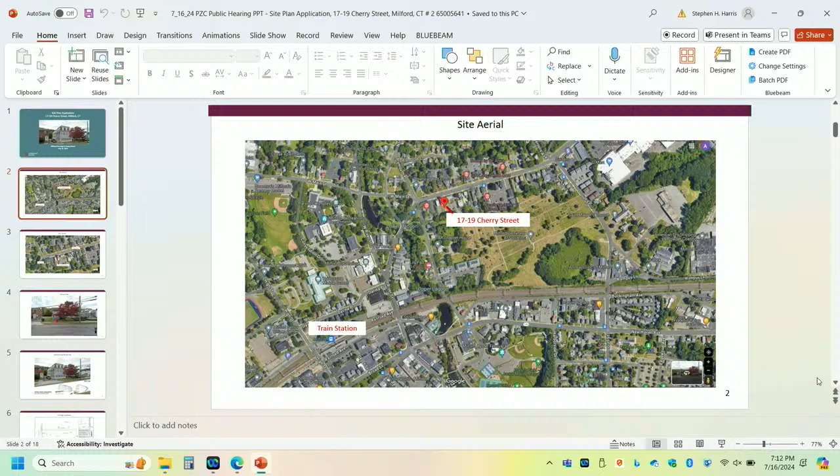Two public bus stops are also located just east of the site on Cherry Street, and one additional stop is located - actually, Mr. Harris, if you can go to the next slide. Thank you. This is just a zoomed-in aerial, and the commission can see the two bus stops to the east of the site along Cherry Street, and then we have one more bus stop to the west of the site at the intersection of River and Prospect Street.

The site as it exists today has a two-family dwelling that was built in about 1920. Site access is via that shared driveway that I mentioned earlier in my presentation, which is shared with the abutting building the commission can see here on the rendering, the brick building located to the left of the page, which is to the east. It's a four-family development.

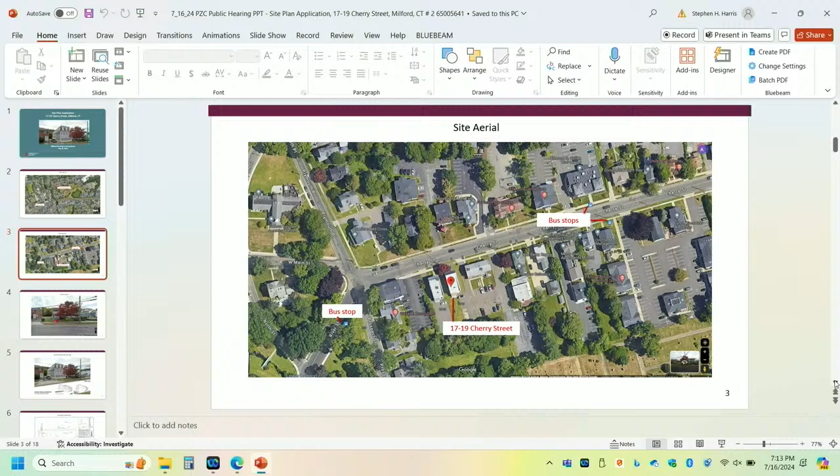Next slide, please. So this is a photo of the existing conditions of the site. Cherry Pie is now seeking to redevelop the property into a new multifamily community with 8 units. Next slide, please. Thank you.

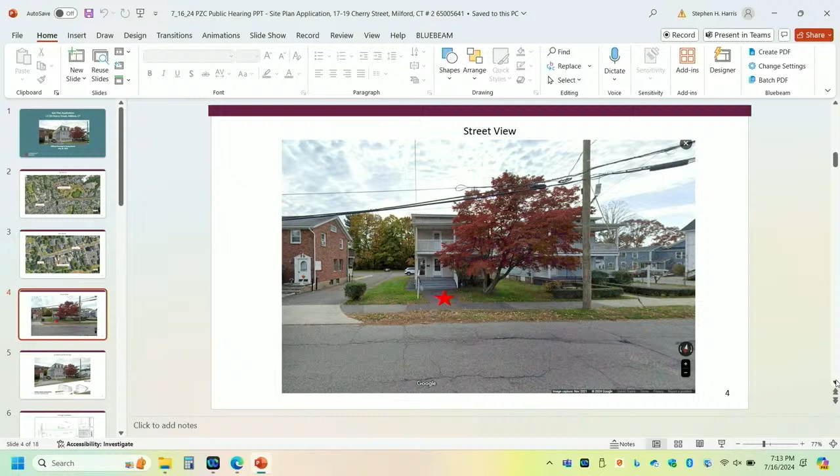This is a rendering that Mr. Gardner put together. He'll be touching on this during his presentation as well. So the redevelopment will be one building, 8 units, which consists of 4 one-bedroom units ranging from about 696 square feet to 839 square feet, and 4 two-bedroom units ranging from about 954 square feet to 1,183 square feet.

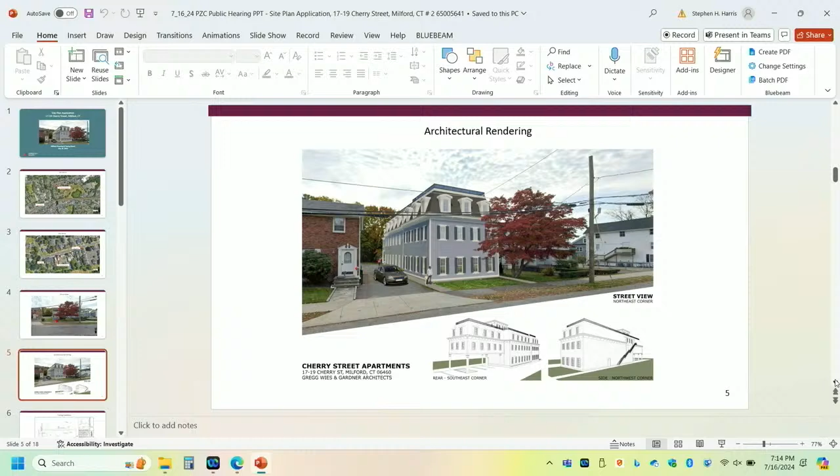There will be 3 residential floors, but part of the first floor at the rear of the building will have covered parking, and we will continue to use the shared driveway. There are 12 parking spaces proposed here. We have essentially 8 surface spaces with 4 auto stacker parking lifts above 4 of those spaces. The 4 spaces with the auto stacker lifts will be reserved for the 2-bedroom units.

But again, we'll touch on this. I'm just giving the commission a little bit more of an overview.

The building will have an elevator, and there will be a roof deck at the rear of the building. New sidewalks are proposed along Cherry Street, and we will be maintaining existing utilities through the Regional Water Authority and United Illuminating.

The application that we initially submitted in March also contained an affordable housing needs memorandum. It's a separately tabbed package documenting the local, regional, and national need for affordable rental housing.

Milford specifically has made progress, but 5.2% of its housing units counted by DOH are deed restricted or subsidized. So 44% of renters in Milford are cost burdened, meaning that they spend more than 30% of their income on housing.

The affordable units that we have here on site, we've proposed 3. They will be interspersed throughout the building, although we haven't specifically designated them. The qualifying income range here is for households earning approximately $53,000 to $86,000 for those affordable units.

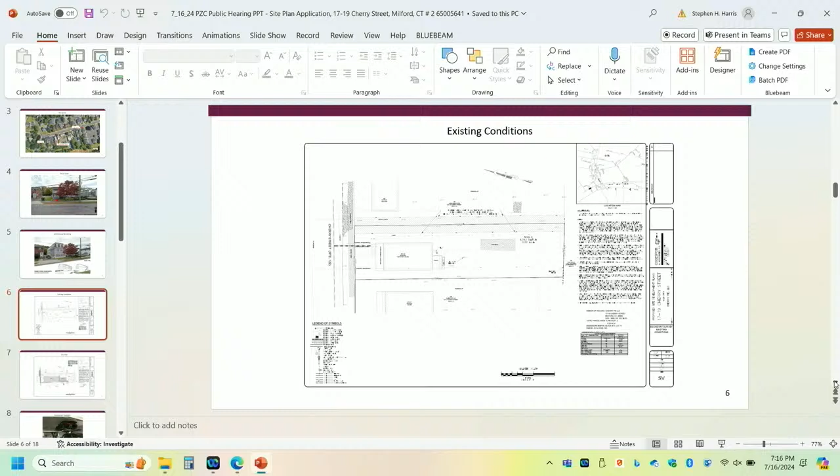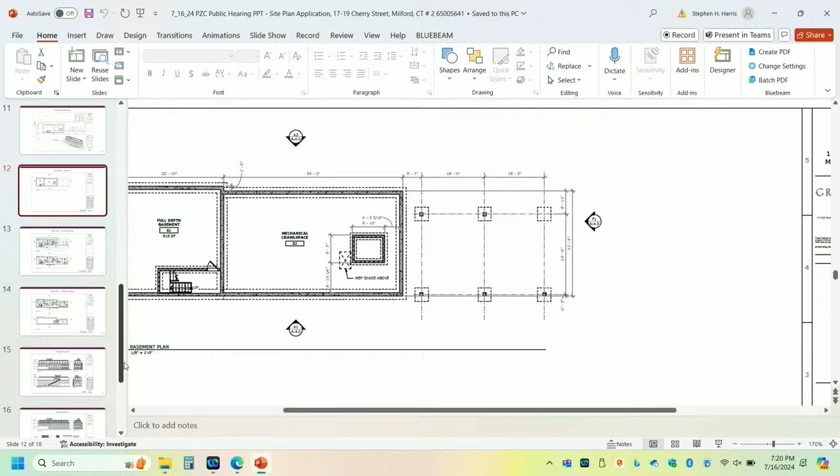Okay, not that far, okay. I think we're going the wrong way. Back up, nope. Back, you gotta go back the other way. Right there, okay. Oh, you don't have the landscape?

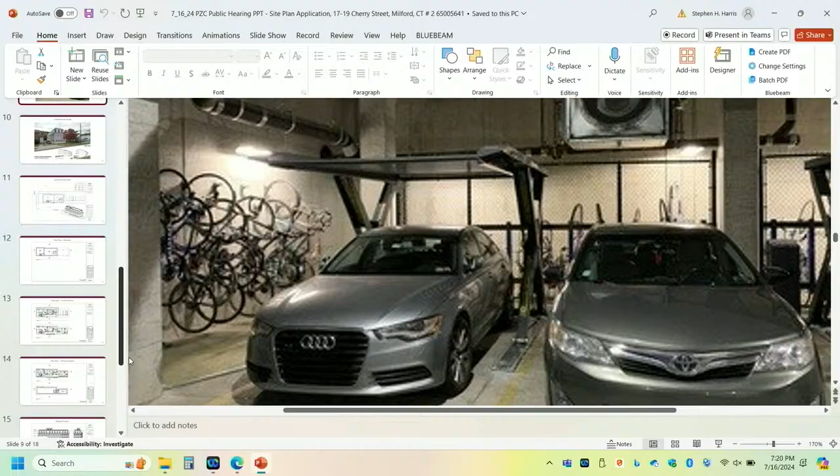On the landscaping plan on sheet SB4, we have fairly extensive planting using native plant materials. The one concern was that maintenance of the plant materials along the street frontage would have to be pruned to always maintain a good sight line coming out of the driveway. The lighting plan uses LED lighting and would comply with your lighting regulations. I think that is all I have at this point.

I think you continue with your presentation unless anyone wants to address questions now. We can wait till the end for questions if you'd like.

Based upon the stormwater management plan, what we're looking at is an existing site that has approximately 61% impervious surface coverage, consisting of the existing building, asphalt parking, and sidewalk area. The site and topography are essentially flat, with a small ridge line running across the front of the building, that portion sloping back towards Cherry Street, and the remainder of the property pitching to the rear towards the cemetery.

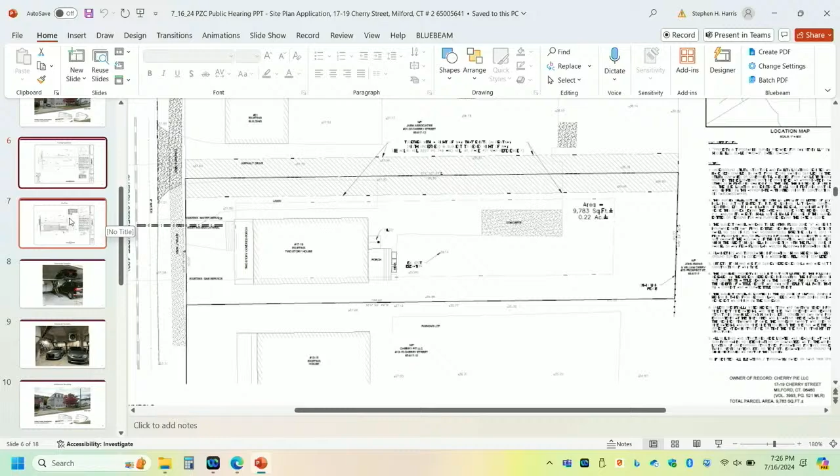Based upon our analysis, it's my professional opinion that the proposed stormwater management system will not have any negative impacts to the site or to adjacent properties, as long as the system is properly installed and maintained.

We're looking at sheet SP3, the soil erosion sediment control plan, comprised mostly of standard measures to be implemented during construction, consisting of silt fencing along the north, west, and south property lines, and a fiber waterlog system set up along the east property line in conjunction with the shared driveway with the property to the east. We also have a topsoil stockpile area provided in the southeast corner of the property.

All major utilities will be provided to the site, consisting of water, sewer, gas, electric, and CATV. As was pointed out before, we have 2 existing fire hydrants: one on Cherry Street, approximately 415 feet from the project area, and an additional hydrant at the five corners on Plymouth, about 200 feet away. In accordance with the fire marshal's recommendations, because we are sprinkling the building and there's going to be a hose connection to the building itself, they typically require a hydrant within 100 feet in order to provide service, and we will be providing that in our proposed plans.

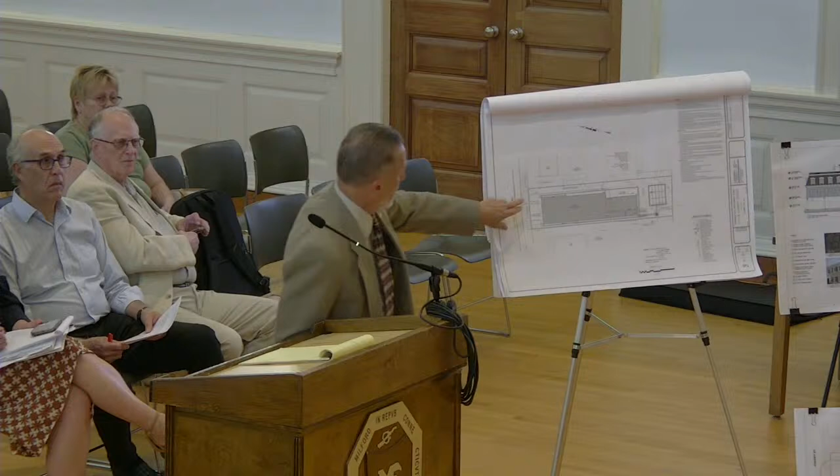Did you calculate the 1,260? What are the numbers that got you to 1,260? Again, I'd have to go back — those were all done in the computer system. It was basically starting from the front line of the building, heading back. And those drawings are to scale, correct?

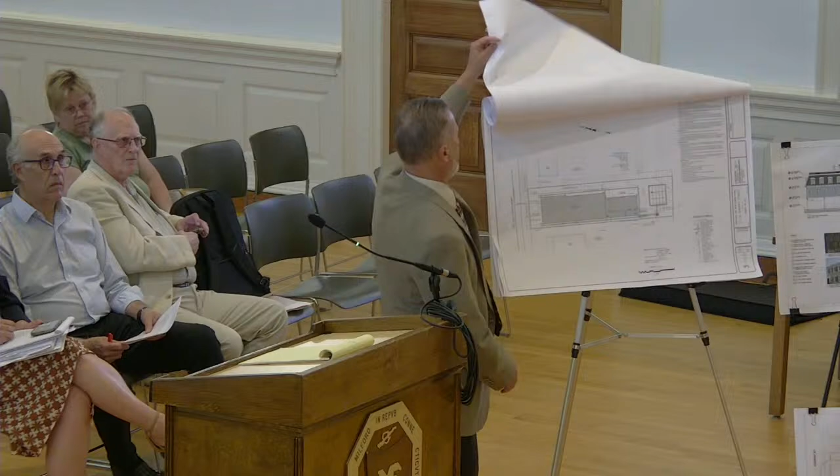I'm sorry, I can't hear unless you go into the mic. The length of the property line is approximately 200 feet. So if we took the 200 feet off of that, and take 20 feet off here because this drains to Cherry Street, and divide that into the 1,260, that's going to give us — if you bear with me — somewhere around 180 feet. So 180 by what gets us to 1,260? Yeah, okay. All right, thank you.

Good evening, my name is Steve Ullman. I'm a professional engineer in the state of Connecticut, employed by Benesch Associates in Glastonbury, Connecticut, and I was retained to do a traffic evaluation for the site development in response to John Thompson's letter. As you know, this is located at 17 and 19 Cherry Street, along the south side of Cherry Street, approximately 240 feet to the east of Prospect Street.

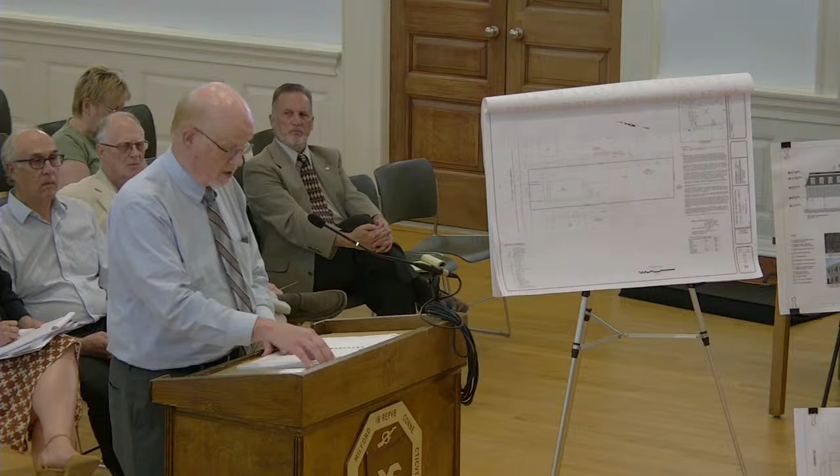It is our professional opinion that the number of trips generated by this development, added to the roadway network, will have little or no impact on the roadway network, and we believe that the development can be operated safely.

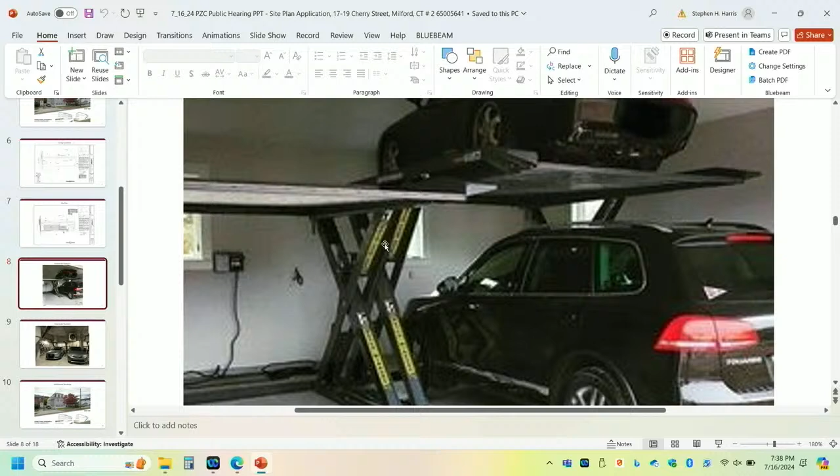At the police commission, there were concerns about the auto stacker and just how it works and what's involved with it. The auto stacker is a unit built for light uses, not industrial uses, mostly residential or apartment type buildings, for someone who has a large garage and wants to get their one car out of the way.

Each tenant that will use it will be given a tutorial by a management company on its operation. They will need to acknowledge and sign a safety training form confirming they received the training and read the manual.

The other concern was how do you handle cars, car on the bottom, car on the top? The auto stackers will be assigned to those tenants that have two vehicles, most likely the two-bedroom apartments. So there will be no issue of one tenant having a car on the bottom and another tenant's car on the top. It will be the same family with the car on top and bottom, so there won't be any confusion as to who has to move the car.

We believe these are safe. People will be trained on how to use them. And if the person assigned that space only has one car, they can either park it on top of the lift, or lift it up and park underneath. So we don't believe there are any safety concerns using it.

I forwarded that information to Sergeant Kraniak this week, and I have yet to hear his opinion on what I provided him, but I did provide it to the commission. If there are any questions, I'll be here, and I'll turn it over to Sam.

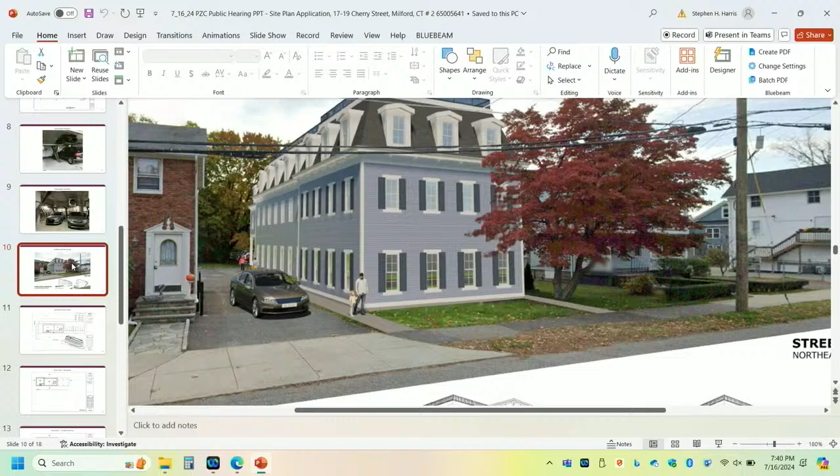This three-story building is a wood frame structure that will have 8 residential units, comprised of 4 two-bedroom and 4 one-bedroom units. The first floor has 2 units near grade level, and to the rear you can see there's a covered parking area. The second floor has 2 two-bedroom units.

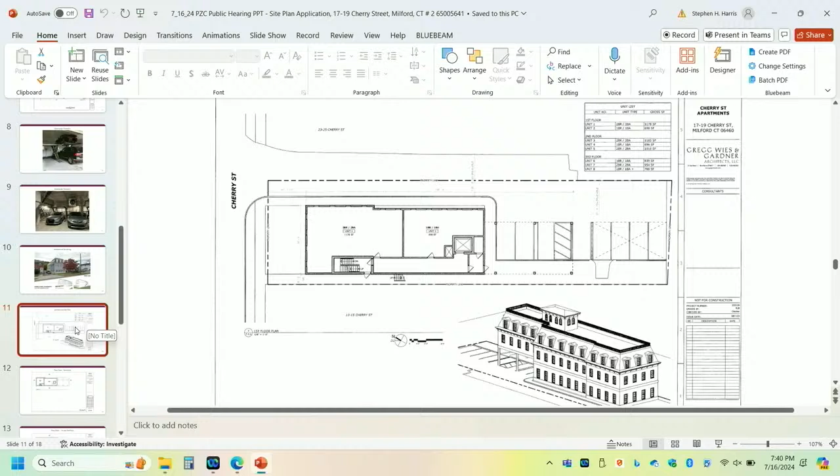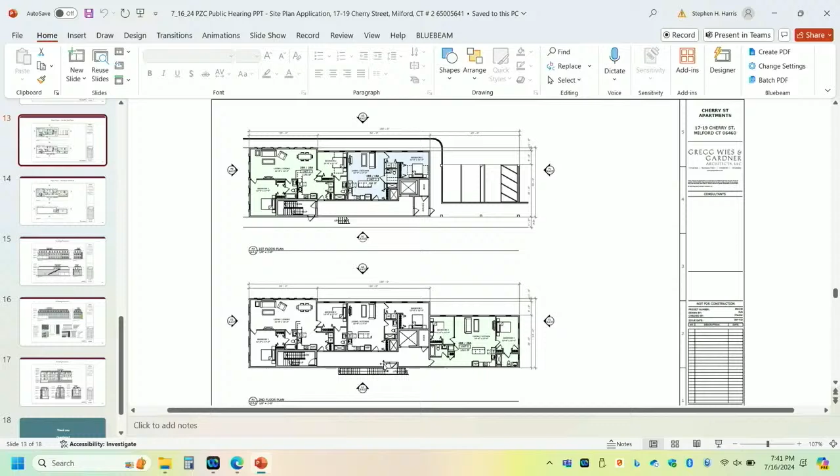The building itself has a roof terrace available to tenants, only at the rear of the building. The front of the building is mostly roof and could potentially be used for photovoltaics if required. The basic gross square footage of this building is 10,000 square feet. We can go back to either of the elevations.

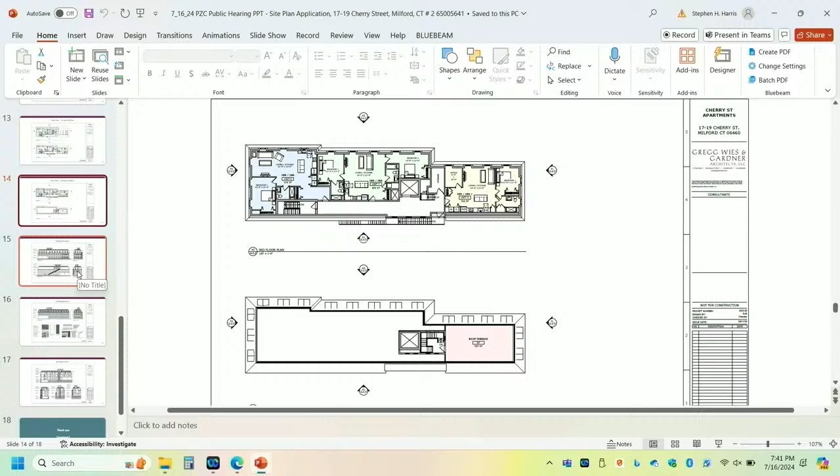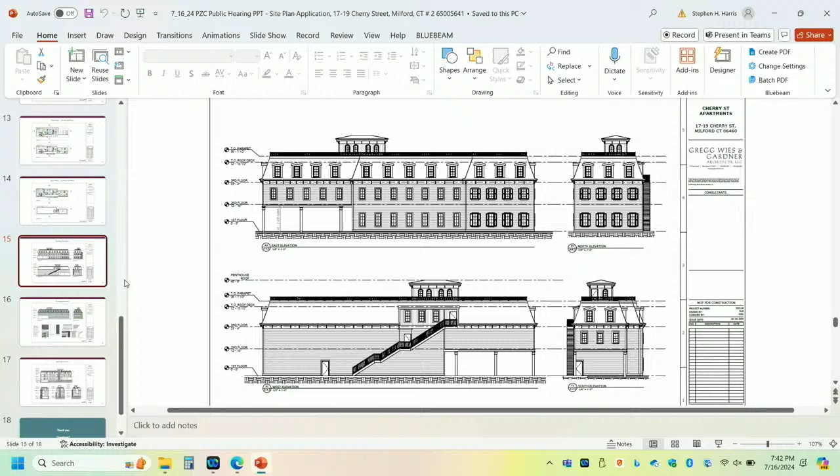Essentially, the building has been designed to look like it was always there, with a style of architecture similar to other nearby buildings. It reads as a 2-story building with a roof. The roof is occupied as a mansard, and there are similar buildings on the street that have exactly the same situation: 2 levels and a third level in a roof plane.

Next slide, please. This is the material board, where we're essentially proposing a gray horizontal siding. All the materials are going to be synthetic, because you don't build in wood anymore for exterior finishes—you either use Hardie board or AZEK trims. The windows will be clad, but inside will be wood. The roof shingle is a synthetic roof shingle that appears like a slate roofing tile.

We also have a decorative railing along the top, to recall historic mansard roof style buildings. We're proposing shutters on the front facade facing Cherry Street, and there will be a frieze board just under the roof plane with corbels, as a decorative detail around the top of the building. We can go to the next slide.

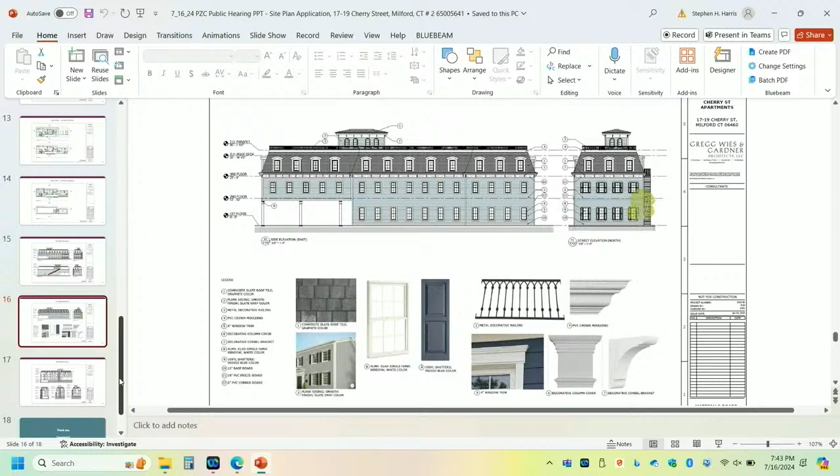Sectionally, what you're seeing is 2 levels of residential in the body of the building, and then a 3rd level which is the roof, but it has units in it. There's a partial basement in the front of the building, only for mechanicals and the sprinkler pump and other things like that. Then we can go back and look at the rendering if that helps people understand what we're doing.

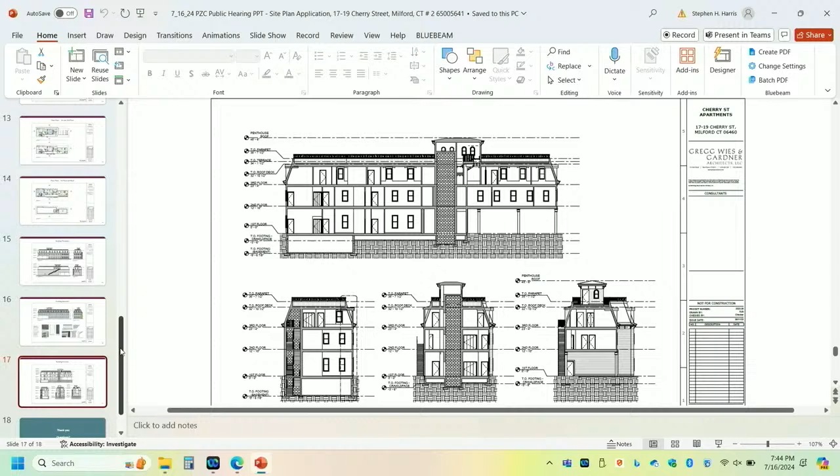The rendering reveals that this building, in terms of scale, is pretty similar to all the other buildings along Cherry Street, and we were purposeful about that. We were trying to keep the cornice line lining up with other roofs on the street, and then you have the mansard roof above that, similar to some of the gables. Across the street, there's a MetroStar building that has very similar massing to our building. That's all I have for now, if you have any questions. Thank you.

Mr. Chairman, at this point, I'd suggest that we pause for commission questions. If there's anything we can answer, I certainly have closing comments, but I don't want to preemptively do those before we answer questions and perhaps even public comment. Very good, that's what the plan is. Would anyone like questions? Go ahead.

Yeah, I'll have a couple questions about the auto stackers. It was mentioned that one on top of the other would be a single column - that would be for a single family or household, right? Correct. My understanding about these is that for safety reasons, with adjacent lifts, basically if you have 3 next to each other, only one person can access them at once, because you can't have multiple people trying to get their car off the lift at the same time. I know there are different designs, but they basically come down and go sideways to let you access your car. So would it be the case that of the 6 stacking spaces - or 8 maybe - 4 stacking spaces, but 8 total cars...

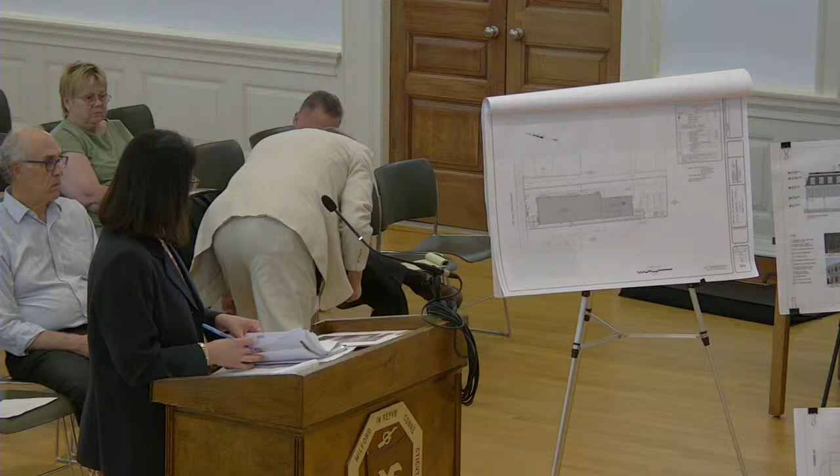Just one moment, board member. I think he's just getting a copy of the plans. Thank you.

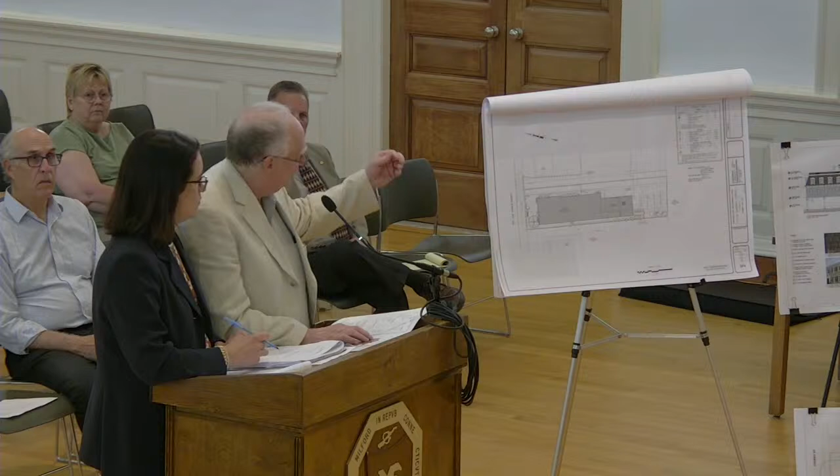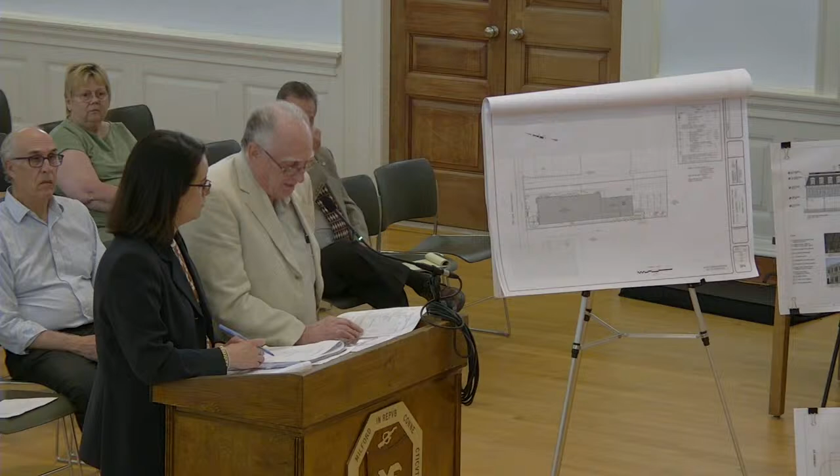Right now, there is shown a Japanese red maple tree there that's got some age on it. If it was assessed, it would probably need to be cabled because of weakness in the trunk line, but it does have a few years left in it, and it would be our plan to save it if we could. Otherwise, we are proposing to replace it with a Shade Master honey locust tree. How old is the tree, Mr. Gordon? Well, I wasn't there when it was planted, but I'd probably guess it's somewhere around 25 years or so.

Mr. Chairman, if I may, just to Board Member Anderson, we're happy to accept a condition of approval that the applicant make reasonable efforts to save or preserve the existing red maple there. So that can certainly be memorialized in the approval. Thanks, I appreciate that. Have you also considered...

Floating the affordable housing units, so that it may well be that you're starting out with one of the three being a one-bedroom, one a two-bedroom, one a three-bedroom, but possibly floating them depending upon your vacancy rate, so you may have two bedrooms that are affordable and one bedroom that's affordable. Have you considered that? That's an interesting comment, board member. The way 8-30g works is there's a next available unit rule, if you will.

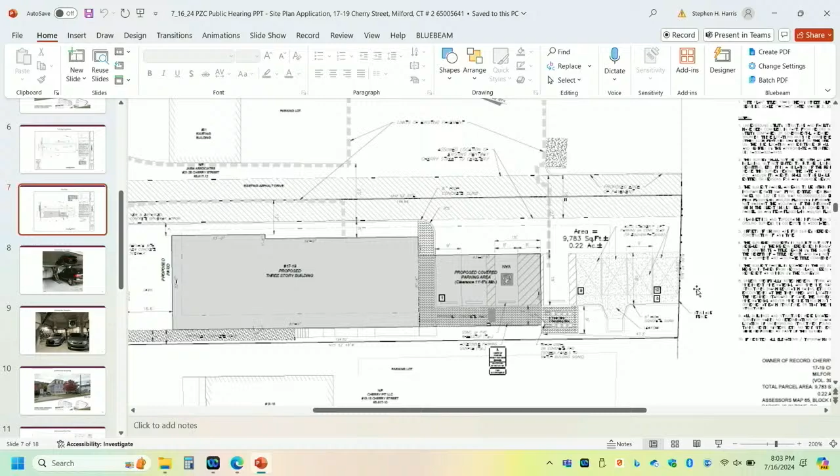Okay, and I'm glad you clarified that, because there's also going to have to be a structure for the auto stackers, and I don't see that in the site plan or the application. If you may, would you mind clarifying what you mean by a structure? I'm assuming the stackers are going to be covered by something. They do not need to be covered. Mr. Harris, if you wouldn't mind going to slide 8.

If you could zoom out so the board could see - this is just an example of what they look like. Obviously this is in a garage, so it's by default covered. We have an example of what they look like, but from what we understand and the way this was designed, they do not need to be covered. There does not need to be a covering to them.

And if we expect that we're going to have young people, children here, how do they get protected? Normally, like a pool, there are ordinances requiring fencing around it so they won't get injured. Understood, and again, we're going to be training the residents on how to appropriately use these. There will be safeguards in place - I don't believe you can just go up to the auto stacker and press a button and it will turn on. There will be certain safeguards to prevent tampering from people not allowed to use them. But if kids are out there kicking a ball around, run into that, and there's no vehicle, they could get injured. I want to make sure about safety - I thought it was under the enclosed portion of the building, but it's open.

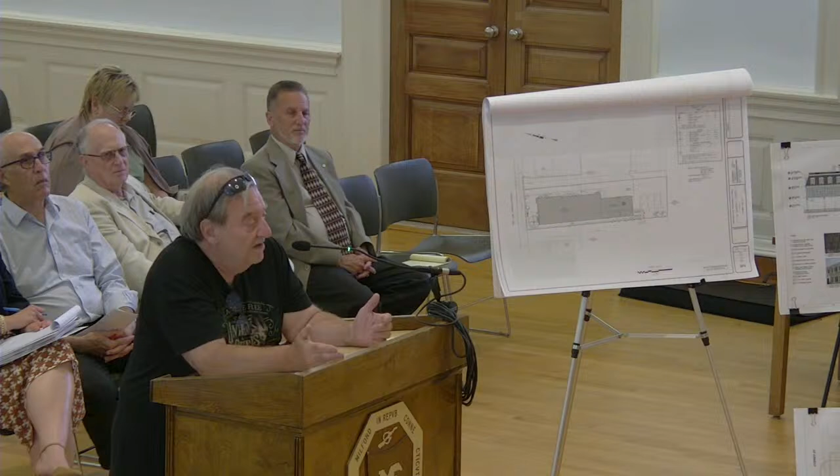And I'm not really against this project, because I even told the guy it's a beautiful looking building. It's going to stick out like a sore thumb compared to what's there, but that's my opinion. Again, I'm not here to knock the project, I'm just here environmentally and safety-wise. I don't know if anybody of you ever saw a car fire in a stackable garage, but I have, in Chicago. It's not fun. Anyway, good luck with your project, and I hope you're our police in Milford.

You're our police. When one person sells their property, that property tax is now spread on 15 people living there. So we get more taxes. Every car dealership that goes in, every condo that gets in, we get more taxes. That's great for us, but let's quiet down what we're building here. We're getting bigger and bigger and higher, and we're not thinking about stuff going into the water.

Thank you for your comments. Thank you.

How you doing? My name's Ralph Malafront. I own 21 Cherry Street, 25 Cherry Street.

The building right next door, they've referenced the shared driveway like they own it. I own it, okay? It's part of my property, number one. Since 1913 it's been called a pathway, so there's an easement to get onto their property.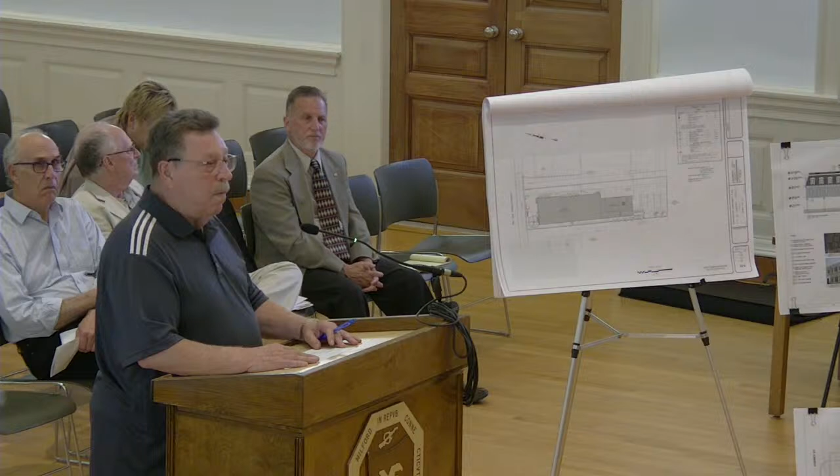On my property, most likely. Not a go. And when it snows, where are they putting the snow? There's no room to move on this piece of property. And the dumpster, where's the dumpster going? I don't know where the dumpster is and how they're picking it up.

I mean, these are legitimate questions. I don't see any answers on this thing. And I'm looking at... can I look over here at this thing?

Mr. Malfront, if you would address the questions to the board, then I will ask them when they come back to rebut, to answer all your questions.

In the four parking spots at the end of the property, I don't see how they get into those parking spots. That's a valid question. I will ask the question to the applicant at the appropriate time.

Doesn't show me, okay? And what else... I gotta go. That's about it. I think they're legitimate questions, and I need answers mostly about where they're parking and how much room I've got to give them for access. It sounds like they're accessing their property off of my parking lot, not off of my driveway. I'll ask that question as well. Okay, thank you.

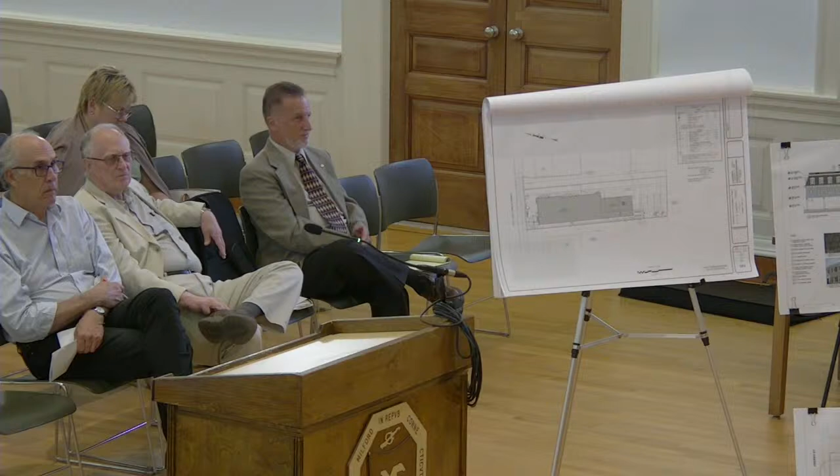Good questions. Thank you. Mr. Malfront, you'll have another chance after the applicant's rebuttal, but keep your thought.

So if you would come back, and if you need to be refreshed on any of the questions I'm going to require you to answer, I will.

Thank you, Mr. Chairman. So I took some notes—if I miss anything, certainly, but it sounds like, procedurally, the board needs some additional information on the auto stackers, including commentary from the police department. I'm seeing a lot of nods. So I think generally, understanding the board has a special meeting scheduled for next week, we would suggest that this...

We do not have a special meeting for next week. Oh, I misunderstood, I thought there was a meeting scheduled for the 23rd. You misunderstood, okay, apologies.

So with that, I presume the board is going to want to continue the public hearing so that we can submit additional information on the auto stackers, and we will respond to some of these questions in writing in more detail.

Regarding concerns about where people will park, I'll say generally that at probably every multifamily community I've worked on, there are always concerns about parking, and generally many of the multifamily developments I work on, if not all, are overparked. The applicant has no greater interest than ensuring tenants have sufficient parking, because happy tenants mean a happy owner.

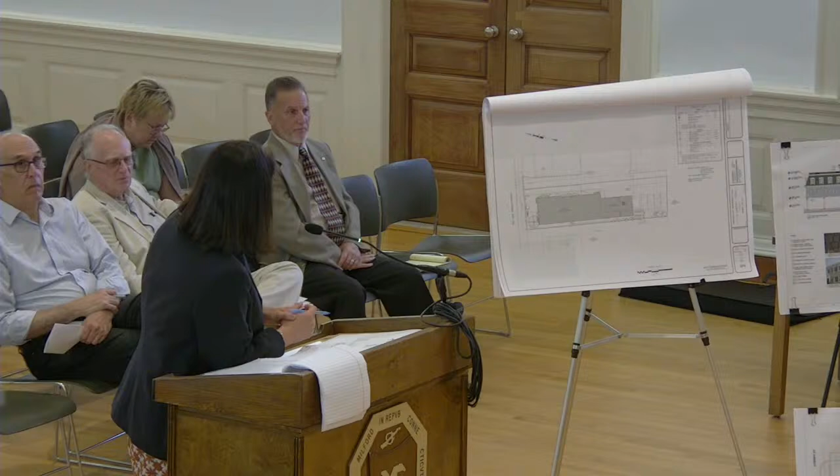So I'm looking at my team. The driveway is expanding beyond the size that it currently is, correct? So my team is confirming what I'm reading on the plan.

We understand that the shared driveway was previously on the neighbor's property, and we have that memorandum issued in May explaining our right. We did research in the deeds for this property and the abutting property. We have the right to continue using what used to be called the Pentway there, but even notwithstanding that, we are expanding the driveway onto our property. So it will continue to be a shared access, I just wanted to make that clear. It's not exclusively on the abutting property owner's land, notwithstanding our right to continue using that.

What if tenants don't want to use it? To that, I'd say practically speaking it would be the same as if any of you were looking for an apartment or a home. If it did not meet my needs, or I did not want to use such an amenity, I would look for another home, it wouldn't fit with what I'm looking for. The same if you're looking for a 3-bedroom unit and they only have a 1-bedroom, you'd keep looking. So the parking situation will be described to any potential renter or resident, and if it's not something they're comfortable with, it will be their decision whether to continue with the rental process. So Mr. Chairman, I think I hit some of the high notes.

Yeah, that's good, I appreciate that. And then when you look at the easement, I didn't see any description of the width of the easement, so clarify your position on that when you come back, as well as show me the turning radius to get into the parking spaces that are outside, and the turning radius to get into the parking spaces that are inside.

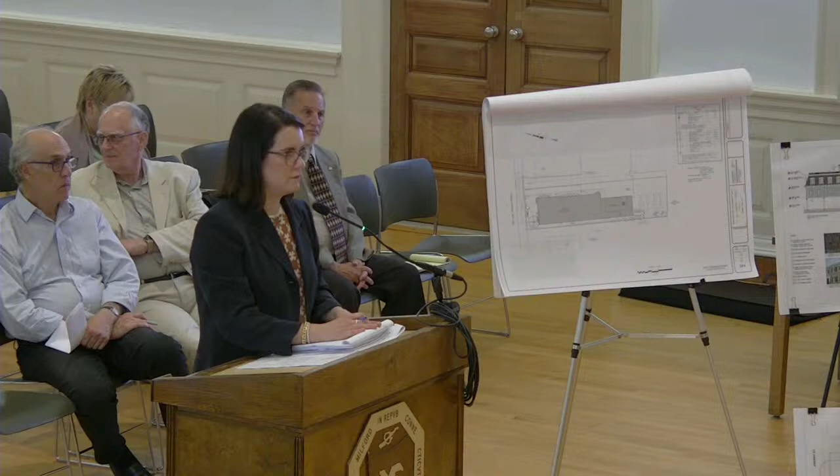Some of those details, if I may, Mr. Chairman - they're in our memo, but we will clarify them in a supplemental filing so the commission has it easily accessible. Yeah, and if you can show us turning radiuses on the blueprint, on the site plan, and have the engineer identify how that is compliant with standards.

Understood. Without objection, we will continue this and keep the hearing open. Stephen, would you want to do the staff report now? I probably should have had you do it before, or do you want to wait till next meeting?

Mr. Chairman, is this a new staff report? What we do here generally is before we start, we have the staff go over their report that they've put in writing, but just to highlight anything they feel should be highlighted.

Understood. May I have a copy? I'm sure you do. Is it Mr. Podolsky's comments? That was, I believe, I'm not sure. No, we did not receive a copy of the staff report. It was done on Monday because we were awaiting the revisions to come in, so it was done Monday. I think it was sent out late Monday, and I know it was sent to the members of the board.

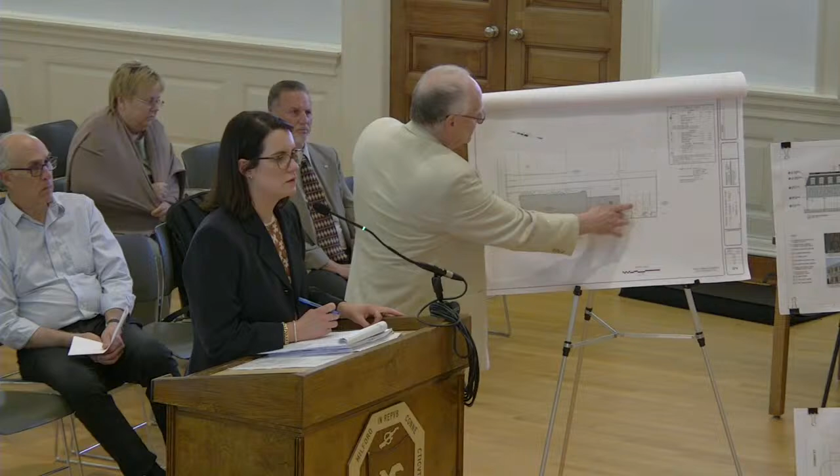Yeah, that would be good if you could identify that as well as the dumpster when you come back with an augmented, clouded site plan to address these questions.

Understood, Mr. Chairman. I just looked at my colleague—we did not receive a copy of the staff report. Then we will make sure you get it.

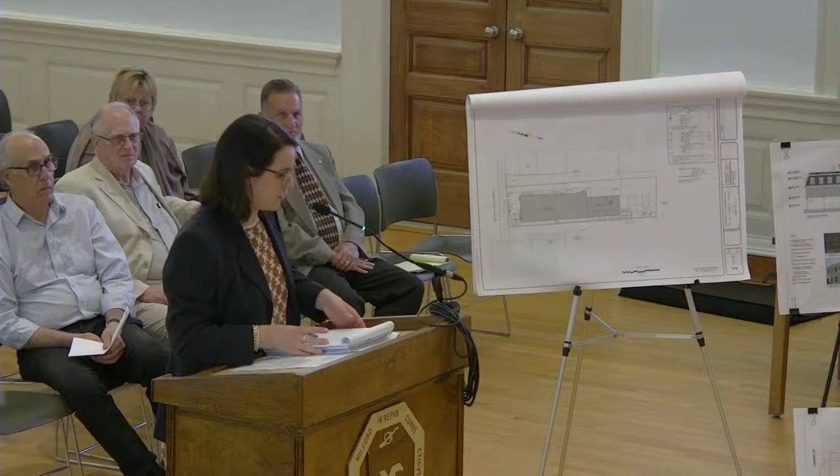Absolutely, thank you. And just so the commission knows, while we have it up on the landscaping plan behind the stackers, or to the west of the stackers, there is a snow storage area indicated. Right, just eliminating one of the low-hanging fruit, if you will. Understood, thank you.

So I'll be in contact with Ms. LaFawn for a copy of that staff report. Excellent, thank you. So this is held open and sent to be on the agenda for the next meeting.

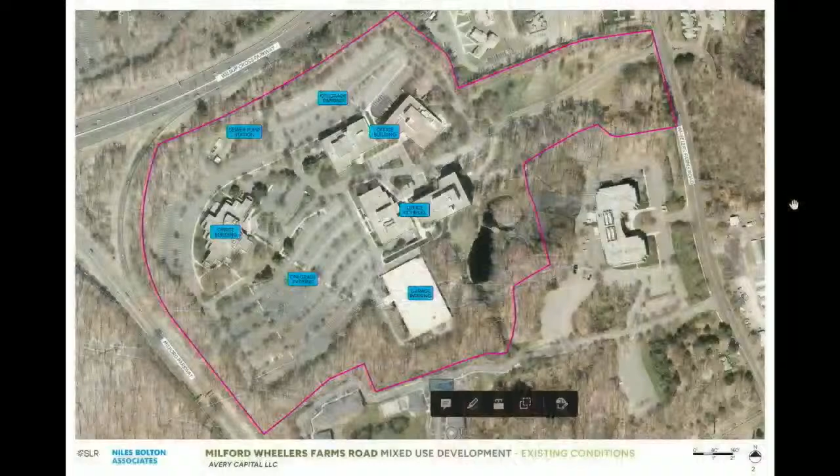What we have tried to promote is a win-win for the property, the region, and the city. I will note there's actually some evidence of what we're trying to achieve here. In the past 2 weeks, Mr. O'Hara, as the real estate broker involved, received a commitment from a commercial tenant to locate a headquarters office use in one of the 2 buildings that we're going to keep and rehab, based on the plan to rehab the building and bring in the mixed uses and amenities. So don't take our word for it—there's an actual recent example of what we're trying to achieve.

So this application is a zoning regulation amendment to create what we call the Adaptive Reuse Design District, ARDD. It includes a statement of uses, a list of the intended uses, design standards, and phases. I'm going to go through this briefly, and then Mr. McDermott will give you more of the detail and the color and the standards. Then we have the preliminary development plan, which at this point is only conceptual, but it shows the layout of all the uses, parking, phases, and amenities.

The Adaptive Reuse Design District Regulation is at tab 2 of the May 15th package. I want to point out that based on our consultations with staff earlier this year, we set this up as a subset of the Design Office 25 regulation. We decided it was not the best thing to do to create a brand new zone. So this regulation, in theory, only applies to the DO 25 properties in Milford, of which there are just 3 locations, 2 of which span Wheelers Farms Road.

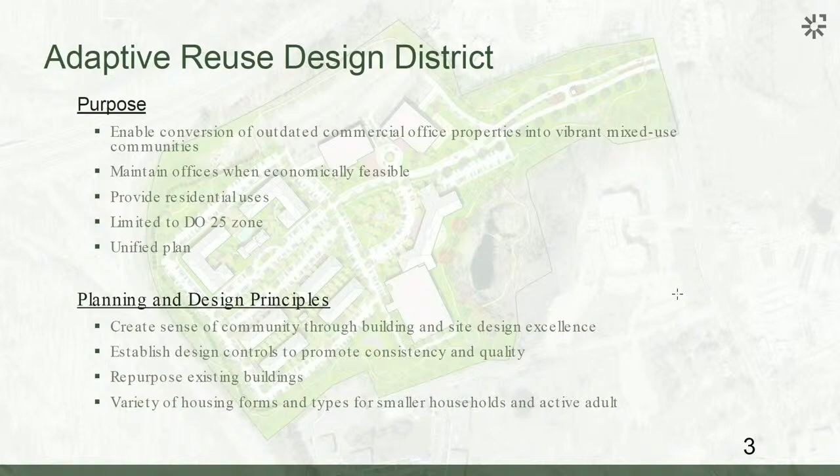So part of the planning and design principles is to create a sense of community. That's why we need larger properties. As part of this, there are established design controls that will be presented as part of the standards and uses to promote consistency and quality within the district. We'll repurpose existing buildings and create a variety of housing forms and types for smaller households and active adults. That's part of your POCD, so we're picking up on that.

Can I have the next slide, please? So, in order to qualify before you, the ARDD must be 20 acres as a minimum. We're larger, but it must be 20 because this could be applied to other properties within other DO-25 districts should you approve this regulation. It must have 250 feet of frontage on a public street, and public water and sewer must be available. So those are some eligibility criteria for not only us, but going forward.

Part of the process requires the submission and approval of statement of uses and standards. We must identify the uses within the proposed ARDD, which may include residential as well as non-residential. The standards must consider area, bulk, location, and density, so you know what you're getting. Building style, height, materials and treatments, so you know how to measure the subsequent architectural plans as they come before you. And as Mr. Hollister identified, it must have the affordable housing provision at 10%.

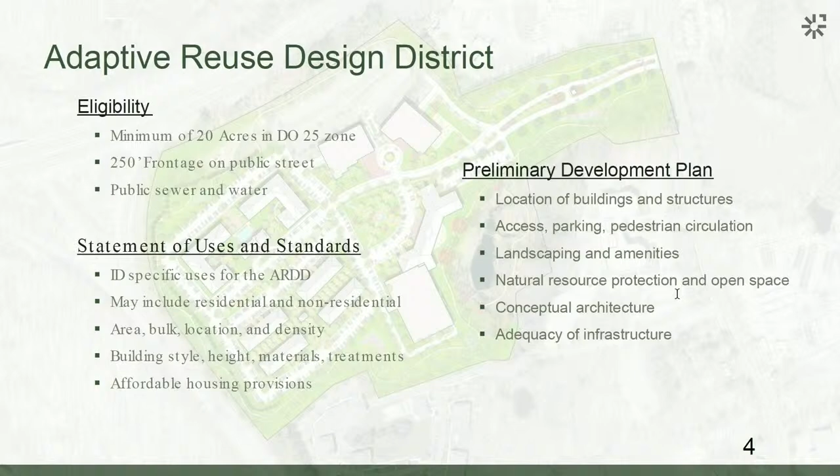This is a two-step process, and we're here tonight for the first one. This is a legislative action by you when you're approving this. You have essentially unbridled discretion, I'm sorry to say, or hopefully you'll exercise it in our favor. That is the approval of the ARDD district, which includes the zoning text, following the zoning text you'd normally have for any zone change, but it must include the statement of uses and standards and the preliminary development plan, which essentially become the regulation for the ARDD. So what is presented in writing, what is shown graphically, are the standards that you measure the final site plans by. That's a little different.

The second step is really the administrative action by the commission, and that is when, if and when the ARDD becomes approved, you're approving the standards and the concept plan. The final site plan must be entirely consistent with what is shown in the original approval. So that includes a site plan following your normal Section 7.1 regulation, in addition to detailed architecture. If the project is presented to you at the time of the ARDD in phases, the site plans can come to you in phases, and as I said, it must be consistent with the statement of uses and standards.

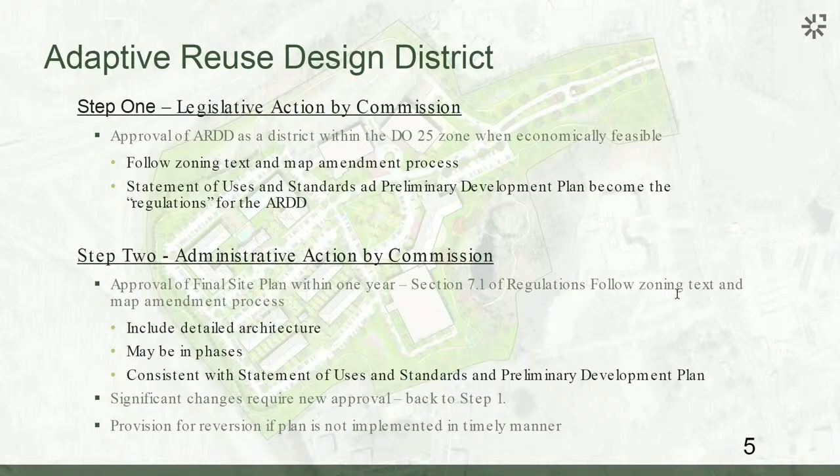Okay, if you don't mind, go back to the aerial, because I want to start there. This is an unusual site bounded by the connector and the Wilbur Cross Parkway, and the buildings are shown here. It really is an isolated section — there are no neighbors on the parkway or on the connector. We have some neighbors to the north, and some neighbors to the southeast. But we have a large property that has some very unique features other than the buildings.

You can see the dark blotch in the middle of the photograph — that's a large pond and wetland area. You can see mature trees along the perimeter of the property that have been preserved as open space, but you can also see within the parking lots and around the buildings other mature vegetation. So the goal here is to fit our development within that 47 acres, currently zoned DO25, as you know.

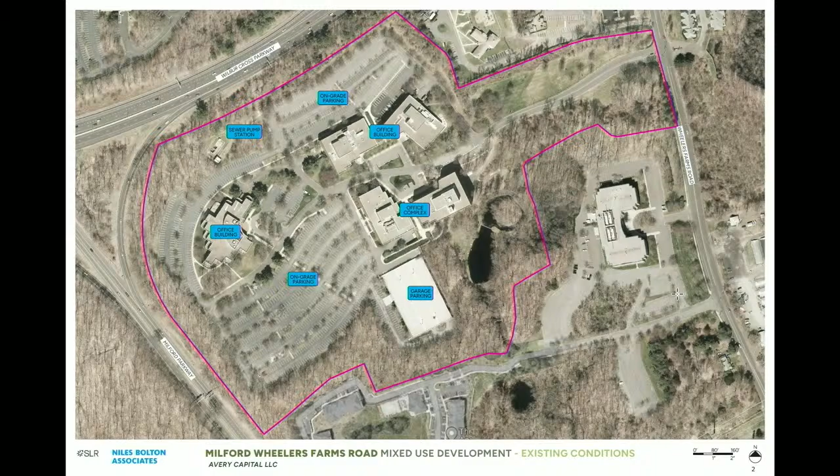This is sort of a standalone property, so we have an ability to create a new community. As pointed out by Mr. Hollister, we have the 5 buildings, an existing parking garage, and access from Wheelers Farms Road. Right now there are about 1,720 parking spaces. Now, I can go to the proposed development.

This unique opportunity we have is to convert outmoded 1980s style development into a productive asset for the city. The vision here is to create an active, exciting, mixed-use community, full service to support live, work, and play. We will have attractive amenities, both for the residents and for the community who may want to visit. We're going to maintain some of the existing buildings, preserve the mature trees, and also restore the wetland as needed.

As you're entering the site from Wheelers Farms Road, you see what we have created as a boulevard, and that has two purposes: one, to create a well-landscaped community, but also to provide a means of exit in the event that one of those sections of the boulevard becomes blocked. You can also see the extensive landscape treatment in the various shade trees and ornamentals that we're showing on the plan.

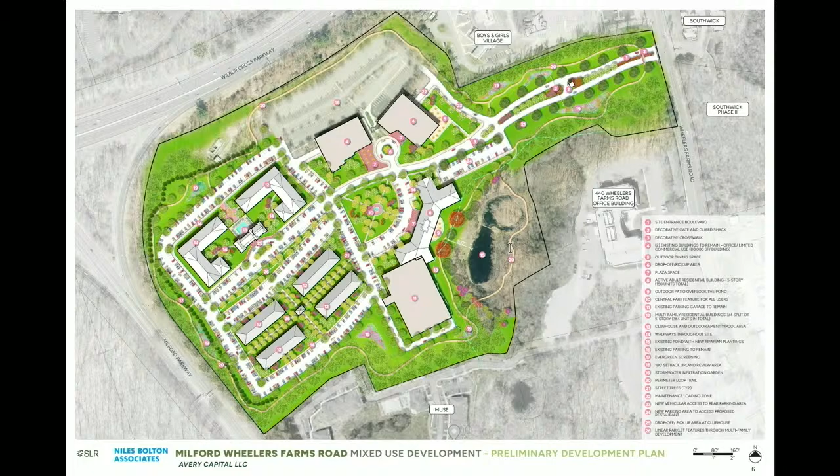Hi, good evening, members of the board. My name is Walter Ploskin. I'm a licensed architect in the state of Connecticut and 11 other states. I'm a principal and partner in a firm called Niles Bolton Associates. As Mr. McDermott described, we're based in Atlanta. I manage our Virginia office. We practice nationally, currently working in more than 30 states, and next year we'll be celebrating our 50th anniversary.

We focus primarily on multifamily housing and projects like this one, a master plan community with a varied type of housing units that promote diversity through a mix of uses—in this case residential, commercial office, and retail. Our firm has completed over 30 projects in the state of Connecticut, so we know the state well and what the market is looking for. We're excited to share with you the vision of the project through the programming, as described in the statement of uses for the site.

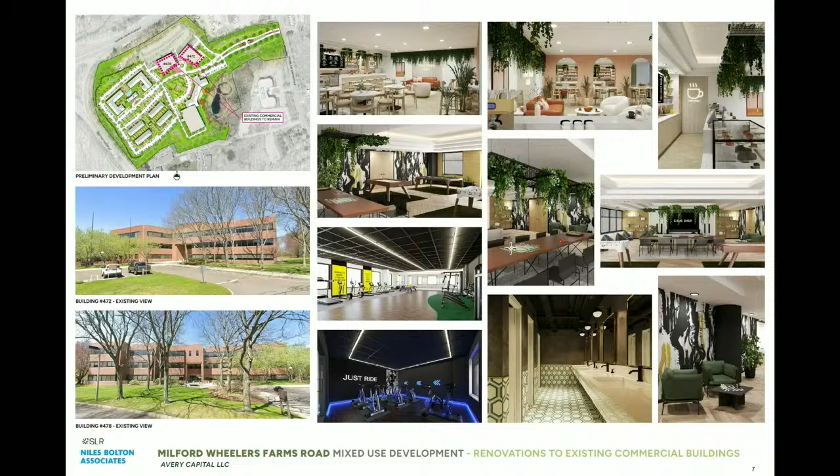The slide on the screen describes the first two buildings that Mr. McDermott highlighted, which are the two office buildings. Those two office buildings are consolidating all the commercial office uses on the site. But in addition, there's a commitment to reprogram or add program to those office buildings that would be more in line with what the market expects from commercial office today.

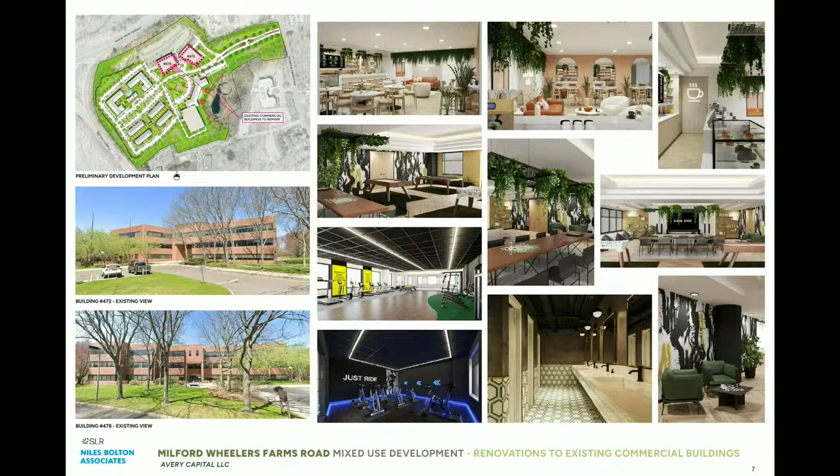That's enhanced amenities that very closely mimic what you'd see in a residential development. What you see on the screen is examples of intimate and communal gathering spaces, fitness and gaming sections, as well as retail opportunity, and in this case a planned restaurant that would serve the business and the community throughout the day and be open to the community at night.

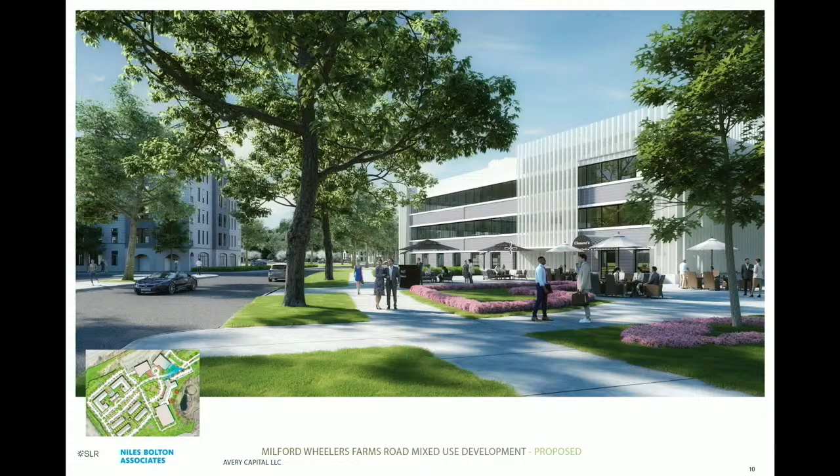Along the end of the boulevard as you come onto the site, we are improving the elevations, the facades of the office building by updating it to more contemporary materials and aesthetics. You can see in the foreground on the right, there's the programming for the planned restaurant space and an active seating courtyard in front of it. And with that, we're planning on adding hierarchical elements to the facade so that you understand the places of use throughout that building as not just a pure office building.

You can see that we're planning on it being a very active, welcoming space as you enter onto the site. The next slide walks past the second office building that's being preserved. You can see off into the landscape in the background, there's a faint image of the existing office building, which would be sort of the horizontal line between the trees at the end of that boulevard.

The next slide shows your first close-up of what the residential buildings would look like. We would continue the facade renovations for the office building to the second building as well. Opposite that office building is where you see that park that Mr. McDermott described on the left-hand side of the image. The residential building in the background...

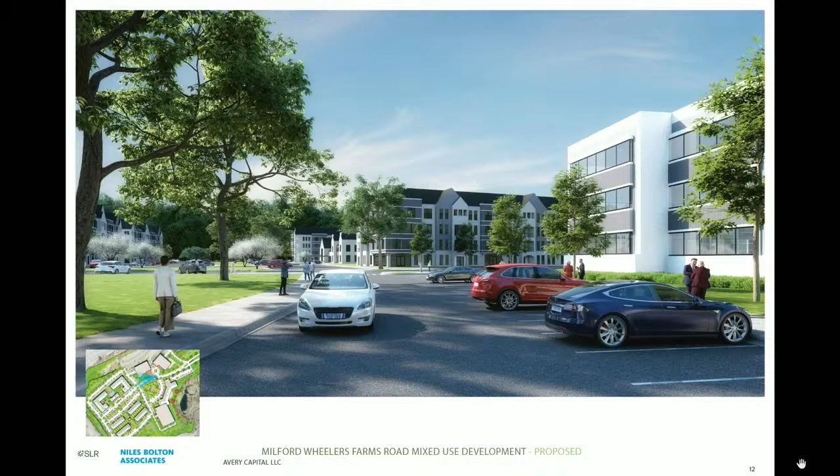You can see we've got varied roof lines, hierarchy in the facade, and it frames the main amenity area as well. Just to the left of the taller portion of that building, you can see a little white cottage kind of nestled in between the building arms. That's the main amenity building. We'll talk about that in a minute.

The next slide shows a little more detail of the materials we're planning for. Very traditional, familiar materials—we're planning on using some masonry, some siding, as well as asphalt shingles. Very standard materials that you see around all of your neighbors, as well as timeless materials that will create a sense of place and a sense of commonality between all the buildings and still allow them to be varied.

The next image shows the same building facade as an orthogonal image, a typical floor plan, as well as the standard ground floor plan. So you can see that we've planned out all the units in this building. We know they work and we know they have access to both the parking that surrounds it.

As well as the amenity space inside of it. These two buildings would account for 220 units in a mix of 1, 2, and 3 bedrooms. The placement of them is really to start the residential component in a slightly more dense version. We've got a 4 or 5 story building there, taking advantage of the grade as it falls down, but then concentrating the number of units around the amenity space. So it really establishes the purpose and the use of the site in the first residential phase.

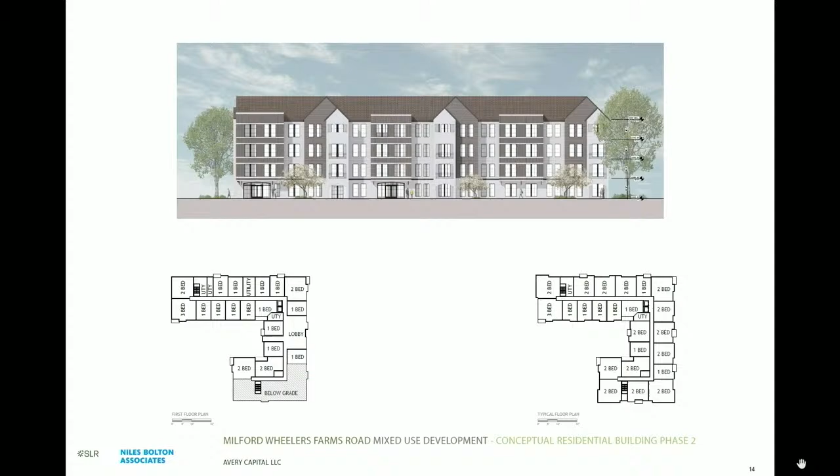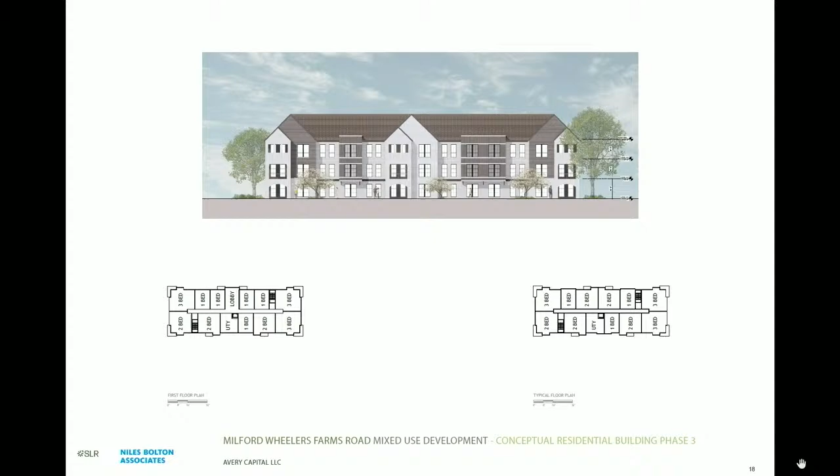The next slide shows that same elevation in orthogonal as well as the typical building plans for that. These units are going to be a little bit bigger. They're a little more remote from the amenity space, so they will have access to outdoor space around them, described as the parkland. But because they're a little further away from the main amenity space, these units are thought to be a little bit bigger in size and a little more self-contained.

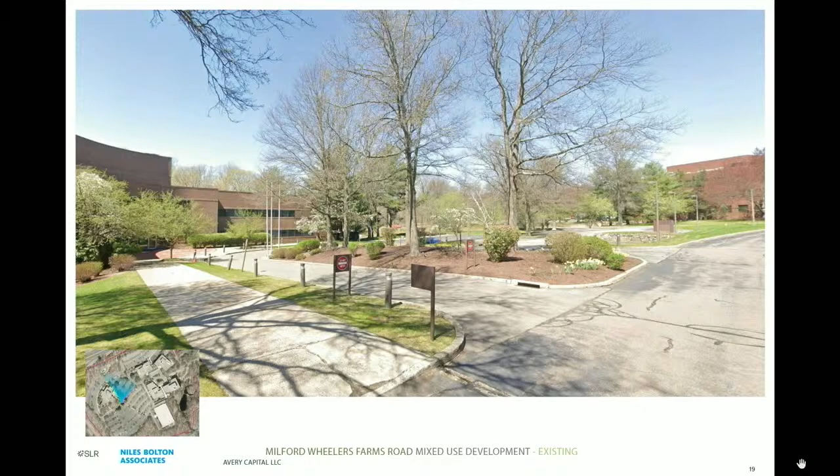The next slide shows the view from that terrace parking lot back towards the existing office building, but the real home run to this image is the next slide where you see the clubhouse.

The clubhouse is thought to be a traditional cottage that has been added onto over time, so it's very traditional and familiar in its appearance, but it allows you to have a lot of the varied amenity uses we'd be looking for. Those uses would include all the common gathering space for the residential community. It would have a club room, a game room, lounge space, co-working for those with a flexible work schedule, as well as a dedicated fitness center.

All of that would open up to the pool deck area behind the building, framed inside of the 2 L-shaped buildings, acting as a buffer from the highway to the rest of the units.

The next slide shows that clubhouse in elevation, using the materials we've been talking about, but in a slightly different way, elevating the architecture where you want it to be around the main meeting spaces or the main community spaces, but still very, very residential, yet in a clubhouse kind of language.

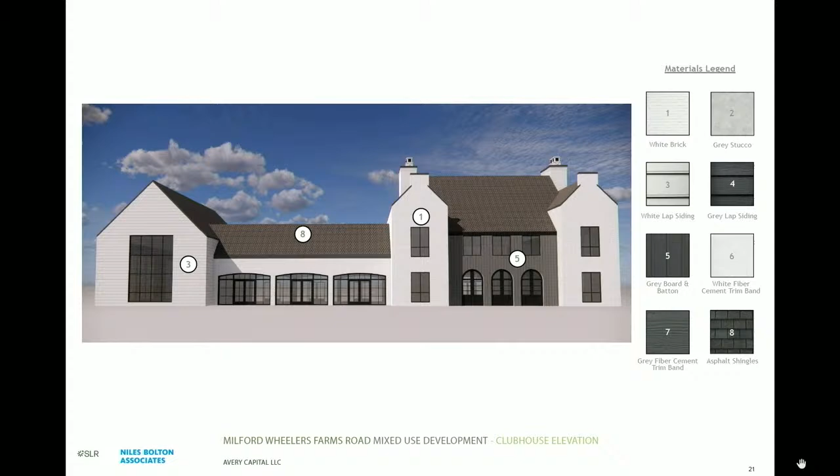And the next slide, that's in elevation. No plan there yet because it involves a much more detailed programming plan to get all those common uses into it.

The age-targeted building, you see a glimpse of it on the left-hand side of the image. It's the tallest version of this architecture that we're proposing, at still only 5 stories, using all the same materials.

The difference with the age-targeted building is that we anticipate a different kind of user for this kind of building. This user might be a move-down from an empty nester, or working professionals that never had a family. So these units are planned to be more 1 and 2 bedrooms, but they start to include dens, so you have that at-home working space or that visitor space that when your family wants to come over you still have living space to spread out to.

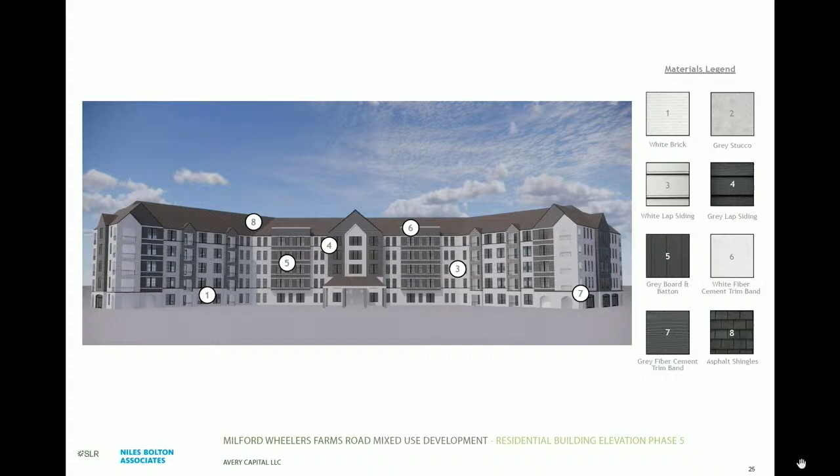The next slide shows it in elevation and the plans showing the lobby space, the club room, and the amenity space. The leg to the left that looks a little truncated is the side that hugs the existing parking structure. The club room would open up directly to the southeast view where the pond is, and that's where our pool deck and outdoor amenity space would be.

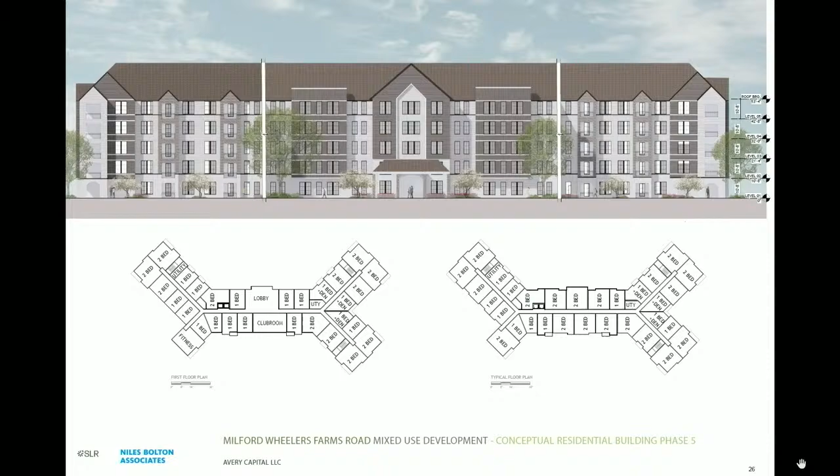And that describes all the uses through the architecture design. And with that, I'll turn it over to Mr. Malone. Thank you.

As you can well imagine, this is a significant project that will get built in phases. In fact, the first phase, and I'll walk you through the phases here, is interior renovations of the office buildings, because in order to keep the tenants that we now have, there will be some movement from one building to another before we can proceed with the balance. So the first phase is the renovation and repurposing of the existing buildings.

The second phase, shown in yellow, will be the entrance drive that I described earlier, all the way carrying through to the larger block of yellow coloring for the L-shaped multifamily buildings.

Third phase, we move into the blue areas, and those buildings would be multifamily as well. But in addition, at that point, we would be able to construct the walking trail, that particular amenity, as well as the restoration of the inland wetland.

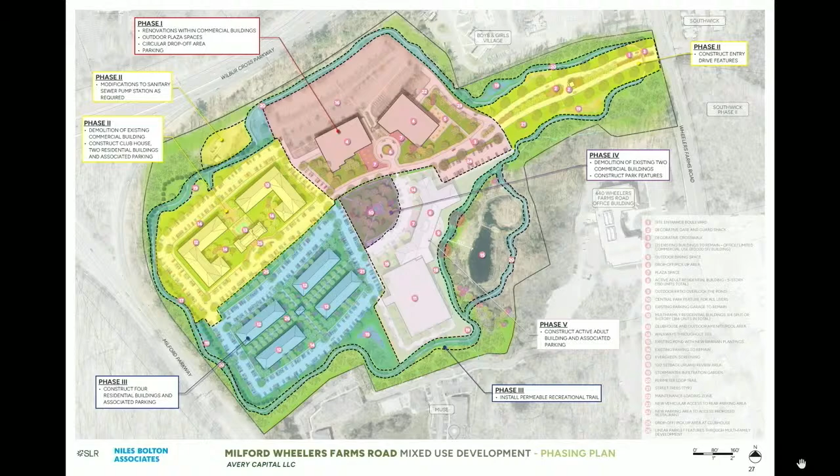That concludes my part of this, and John, my colleague, will talk to you about the engineering aspects, stormwater management, parking, and so on. So John?

Let me clear up my space here.

Good evening. My name is John Milone. I'm a licensed professional engineer in the state of Connecticut, and I'm a senior advisor at SLR Consulting.

I'm going to take a fairly mundane part of this presentation, which will be fairly quick. But I did want to say one thing because it's important to me. I'm at the stage of my career where I kind of choose what I work on. I'm partially retired. This is one only of a handful of projects that I've selected to stay involved in.

When the applicant came to us and said they had this challenge, it was exciting to me. I've done a lot of work in Milford over the years, with a lot of people, and wanted to do something special here. So I've been involved since the beginning of this project, and I'm proud to be here tonight because I think we're trying to do something really worthwhile here.

I did want to mention one thing before I get into this presentation. The applicant asked me to remind you, and it's very important to them, that they've already started a lot of the renovations to the existing buildings they intend to retain here, on the assumption that they're wanting to invest in this project. They're not waiting for something to happen here. They're investing right now and continuing to invest because they want this to be a successful project for themselves, of course, and for the city of Milford.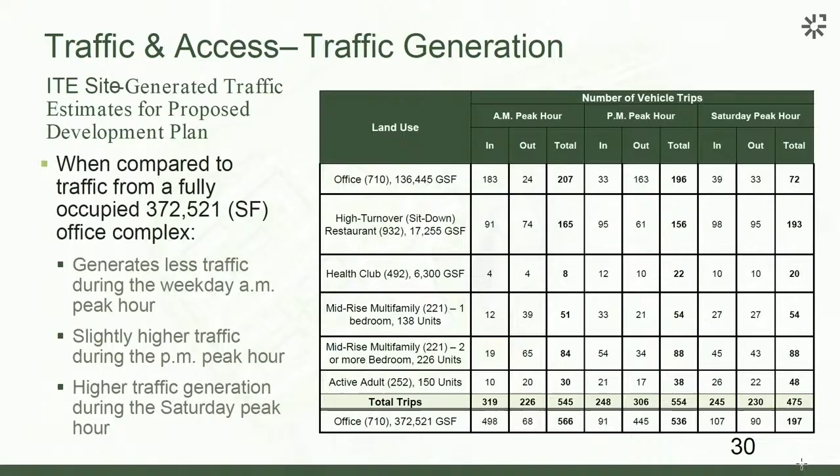Next slide. So in terms of off-site, as I said before, we will need an OSTA approval, but we'll be looking for local approval first. So when we come back with a more detailed plan, we'll be coming back with a detailed traffic report, a full analysis, and an analysis of the signal itself.

We anticipate doing some updates to the signalized driveway at Wheelers Farm Road, adjustment timings, maybe some signal equipment changes, possibly some geometric changes, but we don't anticipate those right now, and we won't know until we do the more detailed analysis.

We looked at the off-site intersections that are nearby, and those have good capacity right now. They're operating at a decent level of service C or better. We know that because there's been recent traffic studies done by others that have analyzed those, and we've looked at those studies. So we think there'll only be minor adjustments to timing at those.

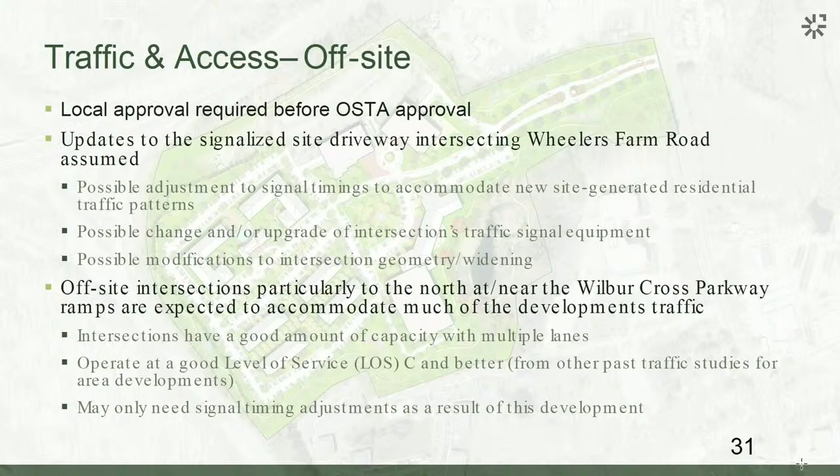Next analysis, Vince talked to you a little bit about parking. We did a very detailed analysis of parking. One of the things we always do is look at your underlying zoning regulations, and there are parking standards for every use within the underlying zoning regulations, as if they're independent on their own. If you look at the bottom of this chart in the lower right-hand corner, that would generate a need for almost 1,800 spaces. It's a good-sized project, as you can see.

We also looked at the Institute of Transportation Engineers parking requirements for the various uses, and their average parking requirement is significantly less, 931 spaces. What they call the 85th percentile parking rate, which is what you need about 85% of the time, is about 1,200 spaces. And with a shared parking analysis, it comes up to 1,136 spaces required.

So we looked at that and said, we think the ITE is a little too aggressive for this development. We don't want to be that tight with the parking spaces. So we did our own shared analysis, because we know that in a mixed-use development there will be shared parking, and without going through a lot of detail, we've taken a 15% reduction in required parking, and we propose about 1,524 spaces. That's substantially more, hundreds of spaces more than what ITE would recommend, but slightly less than what we'd have if every use was independent on its own on generally separate properties. So we think that's a fairly conservative analysis. We think it's enough parking to support the development, but not so much that we have unnecessary paved surfaces, et cetera.

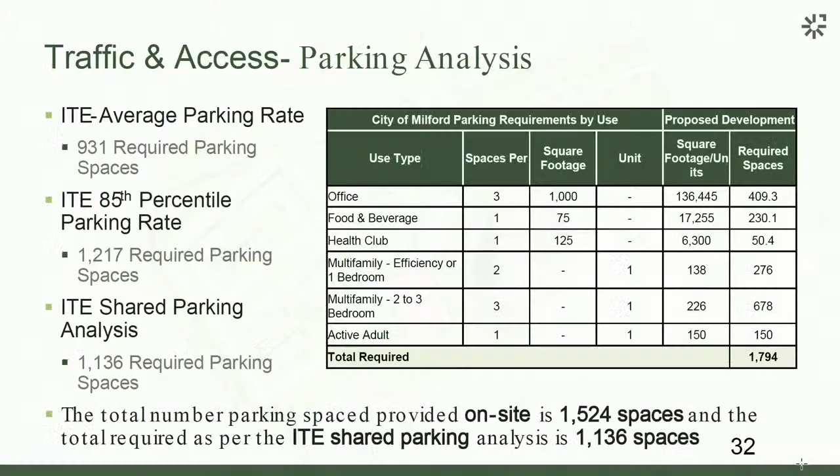Next one, on sewer. Yes? I'm sorry? First line, April... no, the sewer slide. Yeah, okay, April 2024, go back to sewer. Oh, you. First one, April 25th. Oh, yes, you're right.

Tim was just mentioning there's a little error on this slide. So we did go in front of the Sewer Commission on two occasions: one when we first conceived the project, and second when we were modifying the project to add more affordable housing, and that was recently, in April of this year. So that shouldn't say September 25th, 2024 - that should say April 2024 on the first line of this.

What the Sewer Commission does is give you an allowable flow for all the properties within the city. On this site, the allowable flow that they've set aside for this particular property is about 70,000 gallons per day. Our proposed development will generate a flow of 66,000 gallons per day, which is below the allowable flow for this site, and they've approved that gallonage for this proposal. So we have the gallonage approved. That analysis was done by their consultant, Weston and Sampson, where they did an analysis.

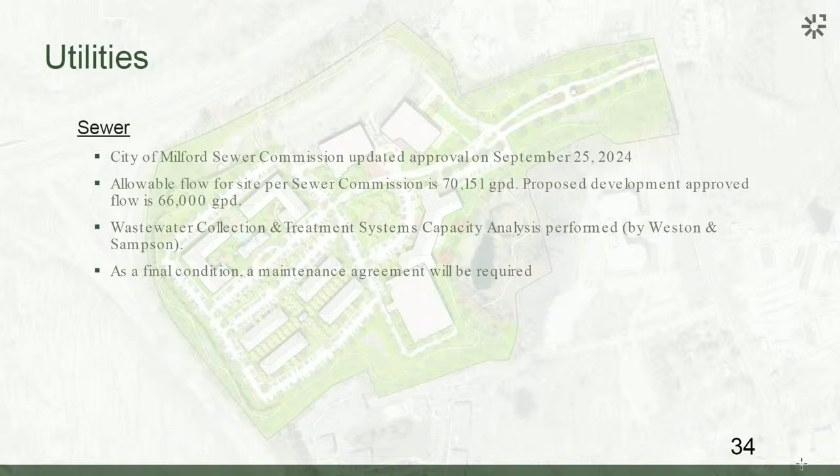What's interesting about this site is that, along the parkway, there's an old sewage treatment plant that was built on this property to support this development before there were sewers in place. That's been converted to a pump station, which now pumps the wastewater to the town's collection system. That'll be retained as a pump station under this development, but they want to make sure we have a maintenance agreement in place so that's our responsibility in perpetuity. They don't want there to be any questions that we're responsible for the pump station on our site that currently exists. So as a final condition, we will have a maintenance agreement.

And the last item I'll talk about is stormwater.

There's an actual opportunity here. This project was designed and built years ago when there wasn't as much attention to water quality, stormwater management, and things like that. So you have old systems, connected systems, pipe connected to other pipe through catch basins and manholes that just has direct discharges. Now we try to interrupt that flow with stormwater management features, natural features, et cetera, which we will incorporate as part of this development.

But we will have a modest increase in impervious surface under this proposal of just under an acre. The site design will provide mitigation for all stormwater, peak rates of runoff and volume up to the 100-year, 24-hour storm required in your regulations, and we would do that under standard practice. The water quality volume, or that first flush of water you hear about, will be retained over the entire property. Per the DEEP criteria for this property, because it falls under the redevelopment criteria of over 40% impervious, 50% of that water quality volume will have to be retained.

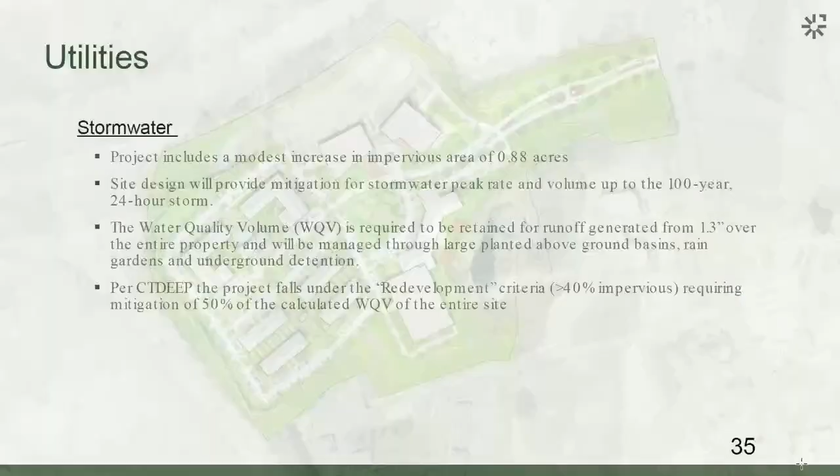We don't have to retain 100% because it's a redevelopment site, but we have to retain 50%. We will look to do at least that and maybe more. The end result will be through a series of above-ground basins, rain gardens, underground chambers, and the like, but we'll separate this. The end result should be a significantly improved water quality situation after we are developed. And with that, I will turn it back over to you, Tim.

Thank you. Just to finish up, Tim Hollister for the record. Because this is a regulation and rezone, you need to think about consistency with the plan of conservation and development, which specifically does not mention adaptive reuse or mixed use, but it does talk about identifying where multifamily and mixed use can be located, and identifies where you can seek opportunities for affordable units. And so at least on that basis, we believe we are consistent with the POCD.

Certainly there's nothing inconsistent between the POCD and what we're proposing. I think we can expect, I don't have quantification, but a local employment boost from a redevelopment of this size. Some residents will work on this site, creating what are known as live-work units, lower or eliminated miles driven, lower transportation costs. In discussions with staff, the issue came up about a public bus route. There's no public bus route, as I am aware, on Wheelers Farm Road, but with the Muse, Southwick, and this development, I think it would certainly be appropriate to ask the Milford Transit District to consider connecting this property to downtown and the train station.

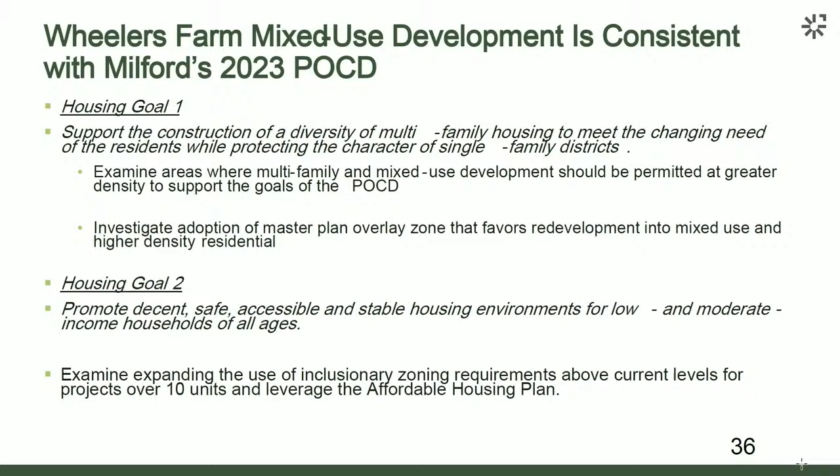So it's a binding commitment on the applicant. As we've said several times, if we came back with something different, something less, you would have the right to say no, that doesn't comply with the commitment you made in July of 2024. So we were holding ourselves to everything we're representing tonight, but we didn't want to impose on the city essentially a regulation that would become binding precedent for you in other developments you may be considering in the future. That was the discussion we had with staff. If you, in your wisdom, have a better way to do it, we're all ears.

Well, thank you very much. We're a little bit tired tonight, so I'll think about this and tell you, but I really appreciate your presentation and the answers we're given. Thank you. Thank you.

Are there any other questions or comments from the board at this time? Yep, go ahead.

Thank you, Mr. Chair. So much of the presentation gives a great deal of thought to the programming involved of all the various phases. So my question regards one aspect of programming, and hopefully it's not considered premature. That would be, I'm wondering about landscaping enhancements, something that enriches the overall complex, signage, and street furniture. What type of plans do you have for those items?

Okay, Commissioner Anderson, I believe those are all final site plan development, because at this point we're trying to show you where the buildings are going to be, where the roads, where the parking is going to be. But Mr. McDermott, Vince, have you held those discussions as yet? Yeah, this is the landscape architect. I'll let him take that.